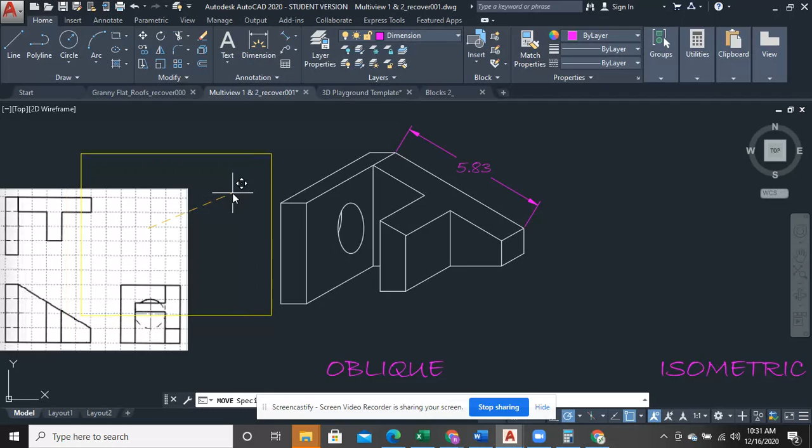All right, so the isometric drawings usually take less time because if you've started with the oblique, you can completely see what you've got going on. The other thing is typically you can kind of remember these measurements as you go.

So what I'm going to do now, remember any line that is in that 30-degree perspective is reusable, and every vertical line is typically reusable unless it's dependent on a different slope. So in this case, the slope is going to come out looking different just because of the perspective.

Ask yourself, is this 30-degree line relative to something on the x-axis? In this case, I'm going to start with my same methodology, and come over one. I'm using my Lego castle. I could repeat this line and type in 3, then over 2, then over 2 this way, and I can remember all of these because I did this just a few minutes ago. Then over 2, over 2, and over 1.

This is one that, for whatever reason, I feel like it is kind of necessary to go ahead and finish the footprint. It's like a backward F. Even though we can't see this, and we won't see this, I think finishing the footprint in this case is a pretty good idea.

If you want, you could always just put these on your construction layer, knowing you're going to end up deleting those in the end. So now I'm just going to borrow from over here because I know that this is 4, regardless of anything else, so that's going to go there, there, and there.

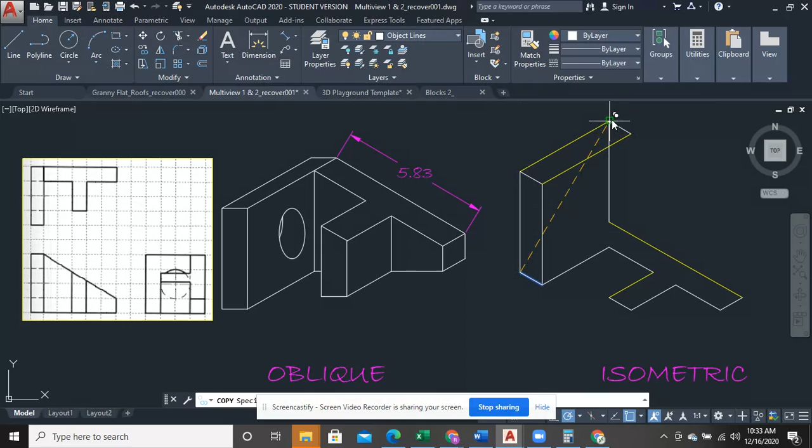Now this has become a part of the drawing. So I'm going to match properties and say, okay, I want it to be on my object line layer. Voila. And again, I'm going to forget these vertical lines until sort of the end.

So, 1-inch lines, I've got some of these. In fact, look at this, all of this is relative to this 30-degree line right here. So in this case, I can just go select all 3 of these and copy them.

Now, if you're doing the isometric first and the multi-view second, it could be the same. You'd find out that you'd be able to copy those just as well. Now I'll never see this again, don't need it.

And I'm going to connect the dots, and let's see if my hypothesis was correct, or guess, I guess you could call it. Does this, in fact, show up as a different slope? And yeah, I can obviously see that it does.

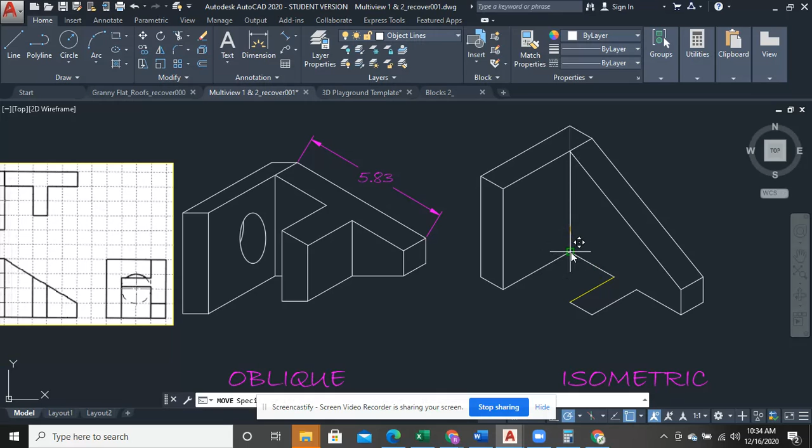I don't see this line here, but I can borrow it. Remember, this is in the back and I can't see it right now, but I can borrow that, and that works just fine. Now I'm almost done. Just got to drop these lines at these intersections right here, so I'll go drop it.

Oh, that gets a little confusing because you can see I'm overlapping again. I'm going to leave that alone for a minute. Maybe I don't even have to deal with it. Again, I know I'm not going to see this, so now I can delete it.

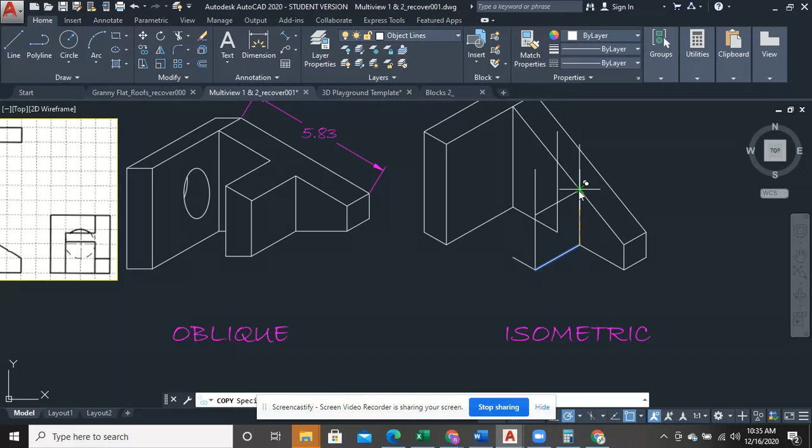Now I can take this line and bring it up to both intersections where the slope is meeting this piece that's jutting out at me. That has established the slope right here, okay?

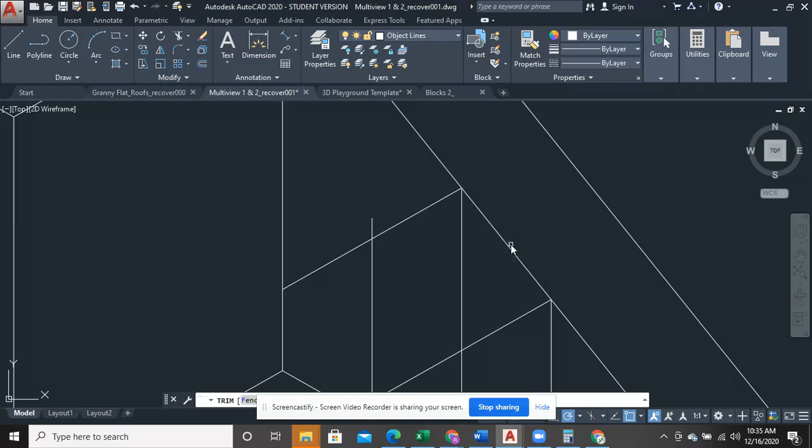So a little bit of trimming. Don't need that, don't need this, don't need this, don't need this, right? Don't need that, that's sticking up too high, that's sticking up too high. Okey doke. Now just connect the dots from here to here. Now I've matched my slope and everything's great.

But I'm going to actually delete this just for a second. Let's see, this might be one of those where everything actually lines up from top all the way down. And yes, it does. Okay, cool.

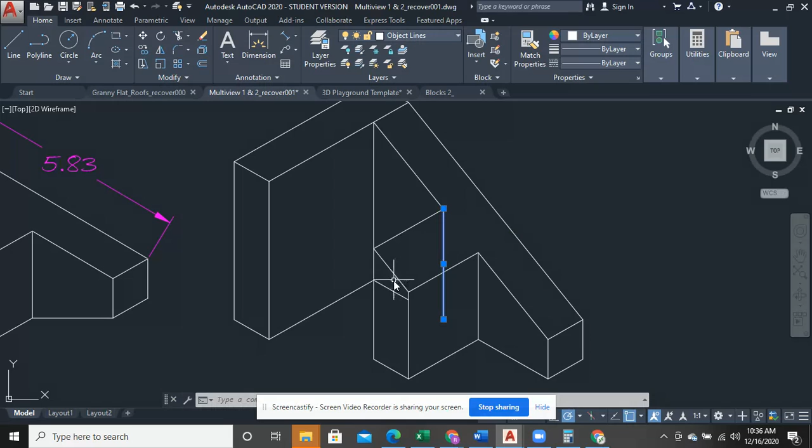And then just delete what you know you can't, or trim what you know you can't see. I know I can't see that. That's kind of weird that that line is there and that line is there. And that, to me, looks sound as a pound.

Now, stupidly, this right was relative to this 30-degree line, and I stupidly deleted my two lines that I needed to get me into that location. And that line was up 2, and it was over this way 2, right?

And that's fine, because doing this is just giving you another opportunity to see how to do that ellipse. So I click ellipse. Only two numbers I'm going to have to enter. I'm going to select right here, and I'm going to type in the radius of that circle, which is 1, spacebar, enter, and then I type in half the radius, which is 0.5.

Didn't work for me. Endpoint of axis. Let's try that one more time. Type in 1, enter, and then 0.5, enter.

All right, and I can see, is this thing tweaked in the right orientation? Now this one is, so even if I had borrowed this, you can see because these lines are in that 30-degree direction relative this way, putting this ellipse in a matching orientation like I had, the other one doesn't look right, right?

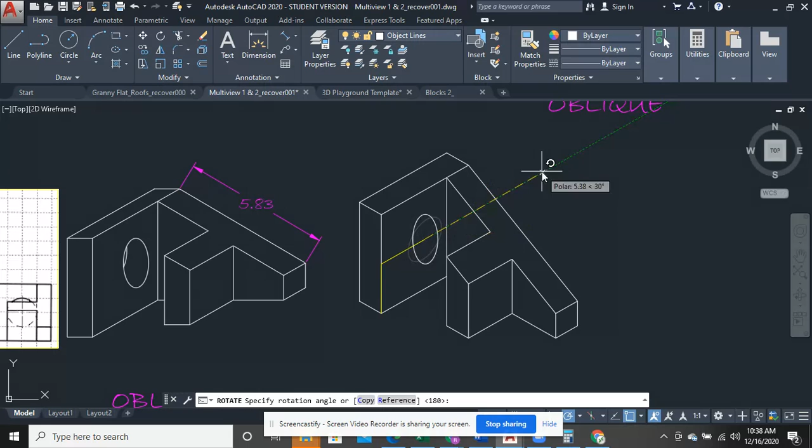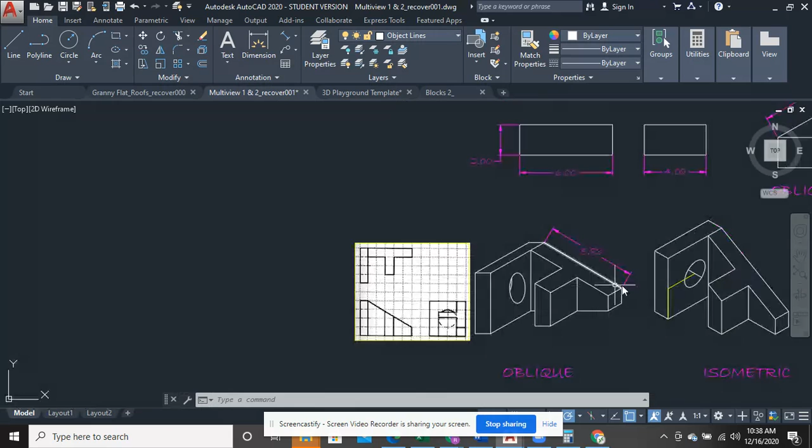So all you're trying to do is assess the parallelism of the hole relative to the position that you have. Now I don't see a gap right here. Like in this one, when I drew that 1-inch line, we saw a gap where I just copied the ellipse and brought it over here. I have no gap over here, so it's just a change in perspective.

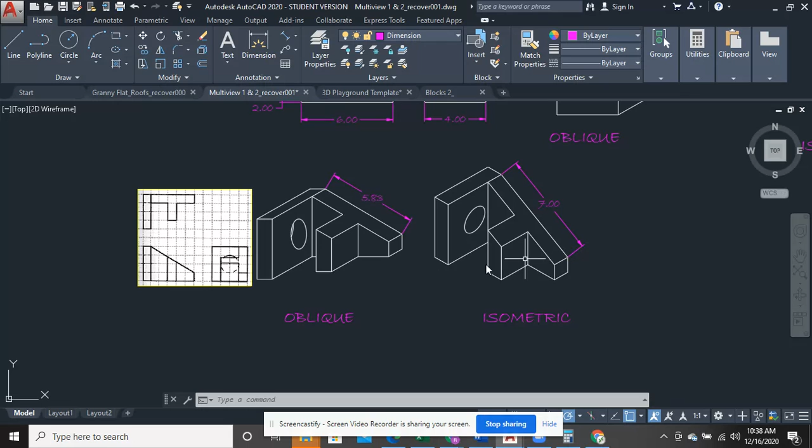And so that is all I'm going to see. That is the isometric. And what I'd like is to go ahead and dimension it with your aligned dimension, and go ahead this way. And if yours says 7 on the button, you nailed it. Okay, so that is it.

And give it a whirl. Again, use this information — stop, pause, rewind, everything else. But I think these are pretty straightforward.